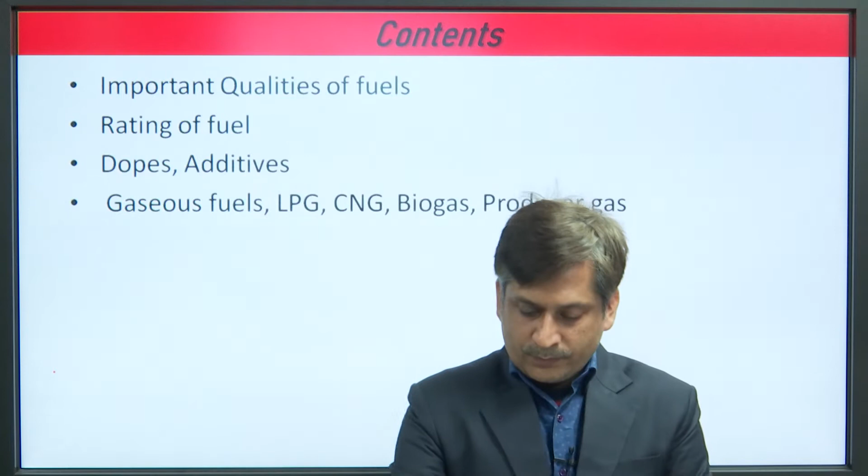So this is again a repetition of the previous lecture, important qualities of CI engine fuels. You know that what is CI engine fuel? Compression ignition fuel engine. So it should have different types of properties, like knock characteristics, volatility, starting characteristics, smoking and odor, viscosity, corrosion and wear, handling ease.

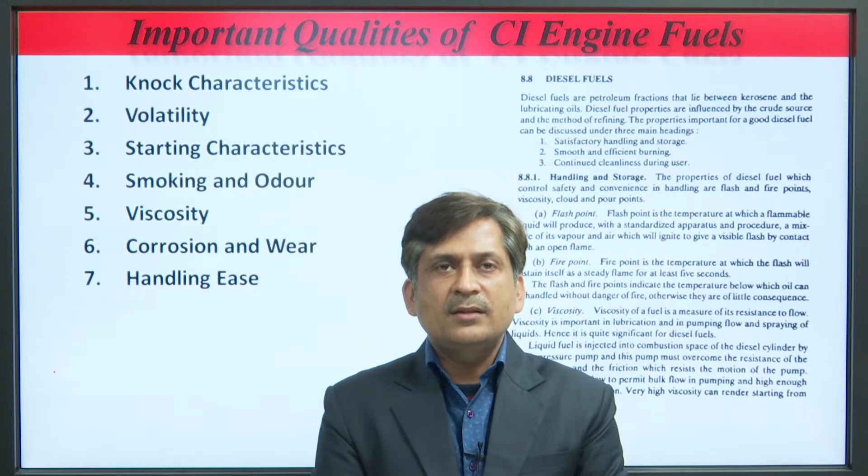We know that in the CI engine we use diesel, which is known as the conventional fuel. The problem with diesel is its limited resources and the emissions. That is why we have to go for alternative fuels in the CI engine. We have discussed how it is handled and stored, its smooth and efficient burning characteristics, and continued cleanliness during use. So these are the properties which are desirable from the CI engine fuel.

So you all know this is the combustion pressure theta angle which defines the phases of combustion. We have discussed this in unit 3. It has 3 phases of combustion. The first phase is ignition delay, which is a very important parameter. This ignition delay is the time period between when you inject the fuel and when the first pressure pulse is observed; that duration is called ignition delay.

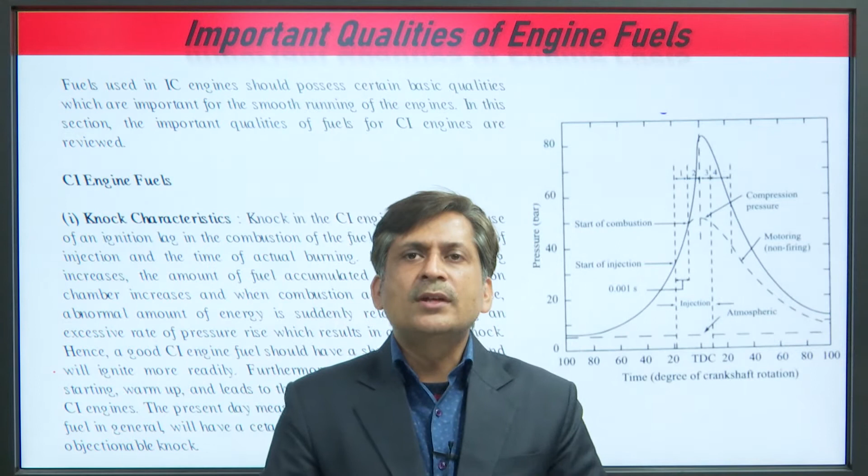Ignition delay depends upon many parameters. We have discussed all the parameters like the fuel characteristics, different viscosities, its cetane number, RPM, types of fuel induction. So all these variables affect the ignition delay. Because this unit is dedicated to fuels, the cetane number and fuel characteristics—viscosity, kinematic viscosity, density, specific gravity—affect this ignition delay.

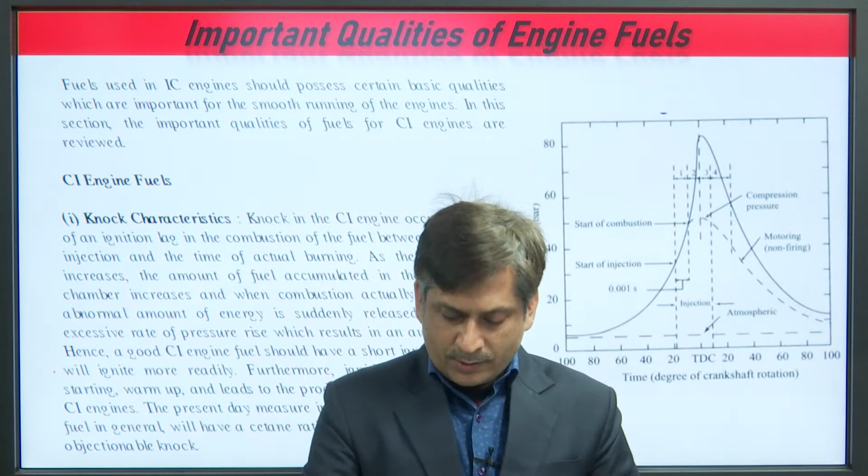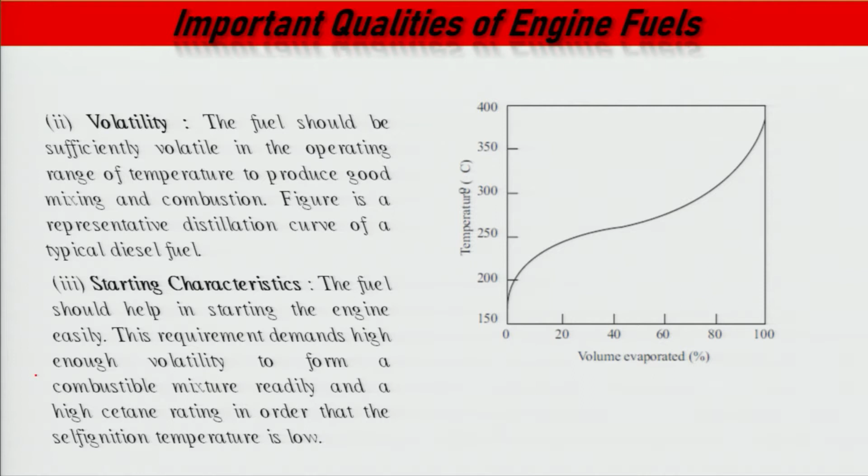Similarly, volatility—we have discussed this. Volatile means, for a given operating range of temperature, how it is vaporized; that is known as volatility. Then the starting characteristic: the fuel should help in starting the engine easily. This requirement demands high enough volatility to form a combustible mixture readily, and a high cetane rating so that the self-ignition temperature is low.

Smoke and odor are qualities of the fuel, characteristics of the CI engine; it should be as low as possible, which is a main problem in the case of diesel engines using conventional diesel. So it is better to use alternative means, or dopes or additives, to suppress this smoke and odor.

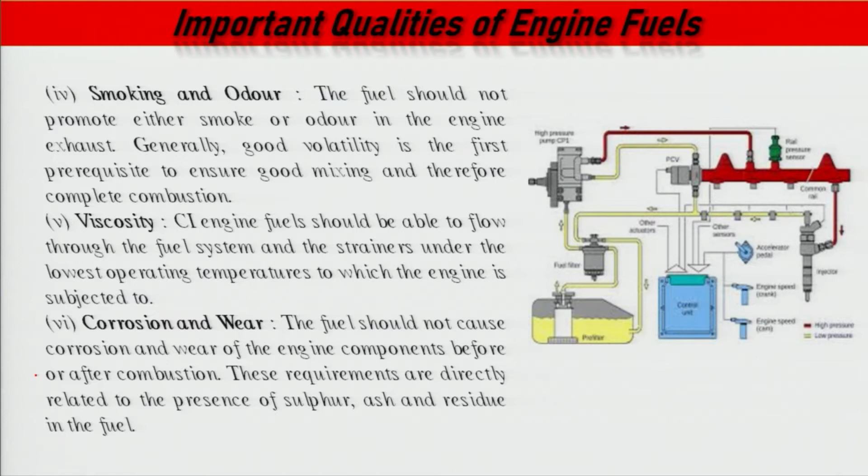Similarly, viscosity—you know it is the resistance to flow. We study how it varies with respect to different operating conditions, and it is a very important property because fuel injection depends upon the viscosity. So it should be optimized.

So the composition of gasoline—these are the important qualities of SI engine fuel, since the last one was for the CI engine fuel. We have discussed in a nutshell the important qualities of SI engine fuel, also known as gasoline. These are the requirements for ideal gasoline: it should mix with air easily, be knock resistant, should not pre-ignite, and be easy to handle. It should have high calorific value and should not form gum and varnish—these are the desirable qualities of the SI engine fuel.

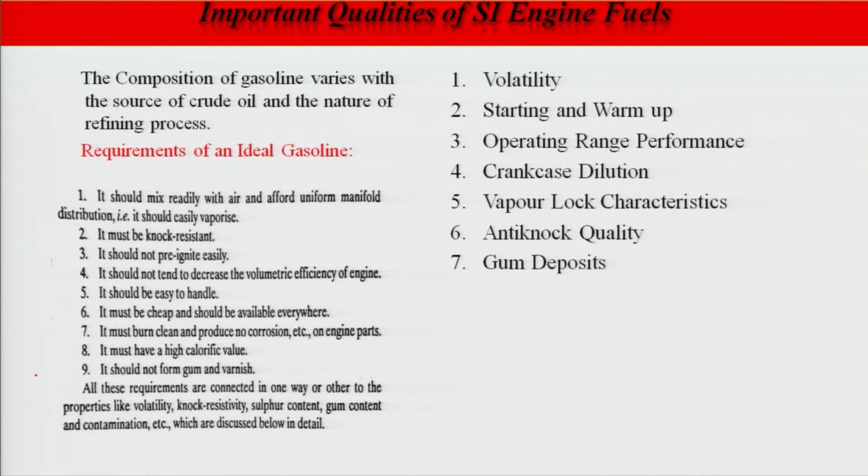It has volatility just like in the CI engine, then starting and warm up, operating range performance, crankcase dilution, vapor lock characteristics—because of the volatility, anti-knock quality, and gum deposits.

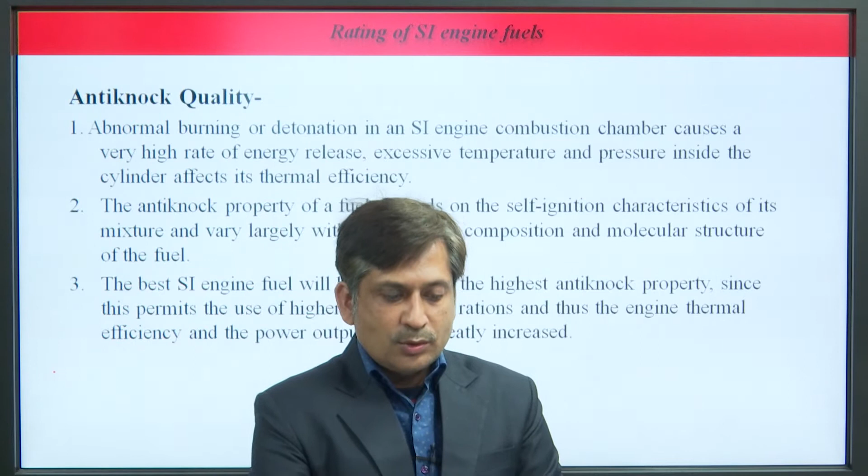So what is anti-knock quality? Anti-knock means to suppress the abnormal burning or detonation in the engine. The fuel should have the characteristic that it should not pre-ignite. The combustion flame should start from one end and travel throughout the cylinder, throughout the combustion chamber, in a uniform way. There should not be pre-ignition or any pressure variation or high pressure wave generation. The burning should be very smooth, and the dP over d theta, the rate of pressure rise, should be smooth.

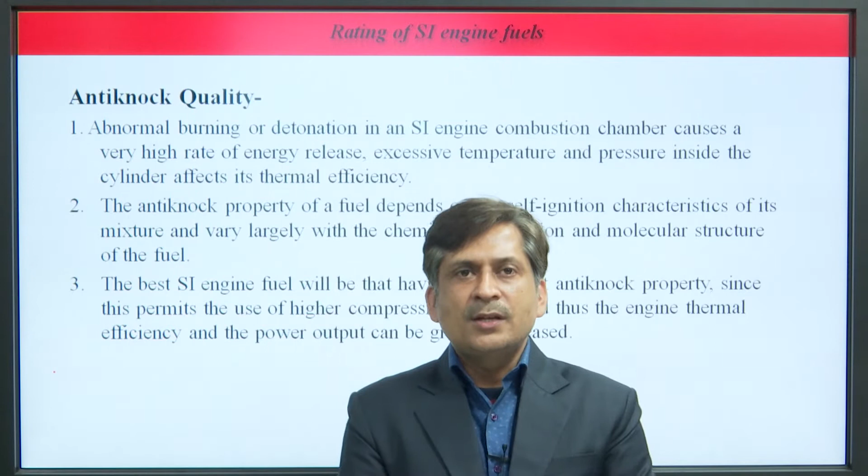So the best SI engine fuel will be the one having the highest anti-knock property. How do you say that a fuel has the highest anti-knock characteristics? These are some ratings of engine fuels—so we rate the fuel. These are the parameters for rating: it is the highest useful compression ratio. You know that the SI engine efficiency, working on the Otto cycle, depends upon the compression ratio.

Higher the compression ratio, higher will be the thermal efficiency of the engine. But the problem is, if you use higher and higher compression ratio, there will be a problem of detonation in the combustion chamber. So this is the limitation for the compression ratio; the highest useful compression ratio is the limitation.

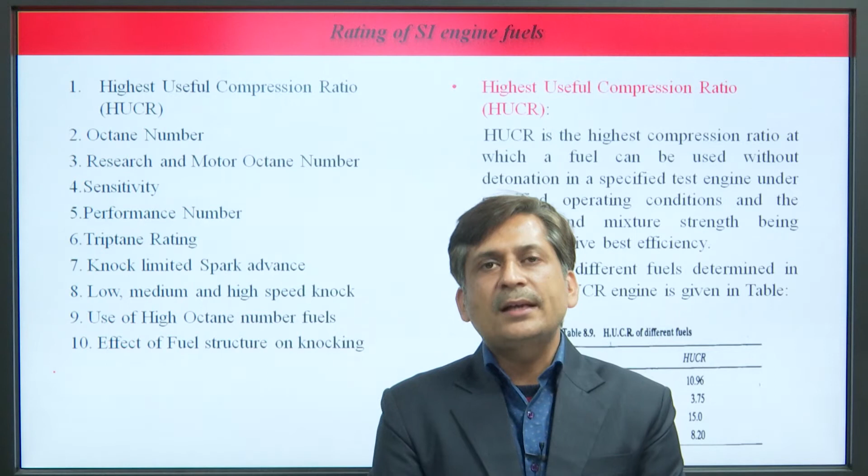It is optimized, it should be as high as possible, and to make the existing fuel, which is gasoline, useful, we can either modify the engine or modify the fuel. Modification is done by adding some additives or dopes into the conventional fuel, which improves its knock characteristics, so you can go for the highest compression ratio.

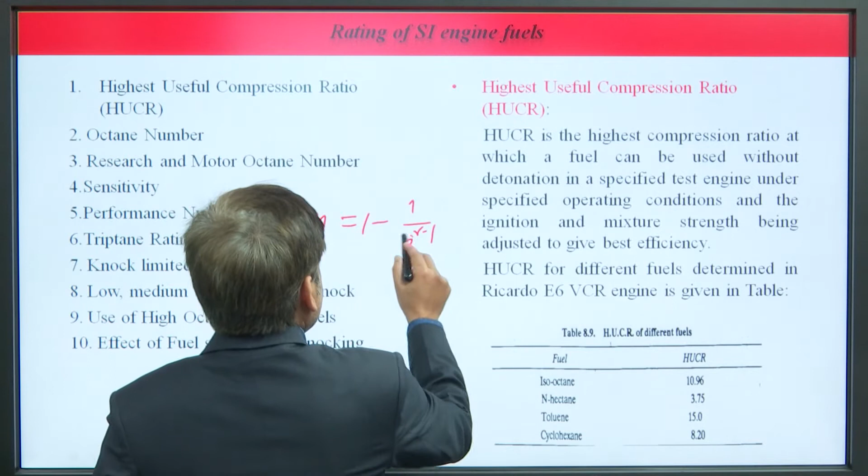Because the efficiency of the Otto cycle is 1 minus 1 upon R to the power gamma minus 1, where R is the compression ratio, you can go for a higher value.

Then octane number - we have discussed this - higher the octane number, higher the anti-knock characteristic of that fuel. It is of two types: research and motor octane number. There is a sensitivity, which is the difference of research and motor octane number.

Another number is also known as performance number. If you go beyond 100, then we go for the performance number. Triptane rating is also one of the rating parameters of SI engine fuel. Then knock limited spark advance, low, medium and high speed knock - we have discussed all these things in the previous lecture.

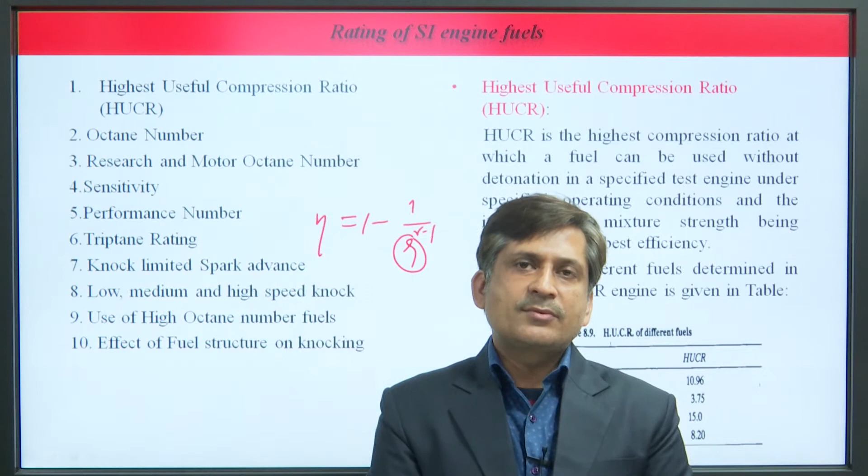Use of high octane number fuels, effect of fuel structure on knocking - because the fuel may have paraffins, branch chain paraffins, normal chain paraffins, naphthenes, aromatics. So all the composition affects its anti-knock characteristics.

So the use of high octane number fuels - the engine can be operated at high compression ratio, and therefore with high efficiency without detonation. The engine can be supercharged.

What is supercharging? To increase the density of the inducted mixture is known as supercharging. So the engine can be supercharged to high output without detonation. We can go for supercharged mixture also.

Supercharging affects the power output of the existing engine, so it is improved. The performance of the engine is improved by supercharging - instead of inducting fuel at atmospheric pressure, you are inducting fuel at some higher pressure. So by doing supercharging, the performance of the existing engine is improved.

So the third one is optimum spark advance, which may be employed, raising both power and efficiency. So we can go for optimum spark advance, then the effect of fuel structure on knocking.

Knocking is proportional to the amount of pre-oxidized but unburnt end gas which undergoes auto ignition. Very light paraffins, such as methane, having very low molecular weight - for example methane, ethane and propane - have excellent anti-knock properties.

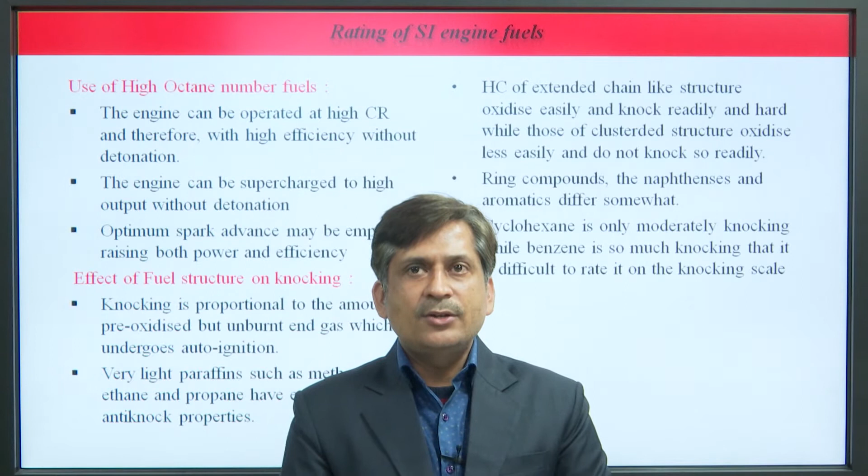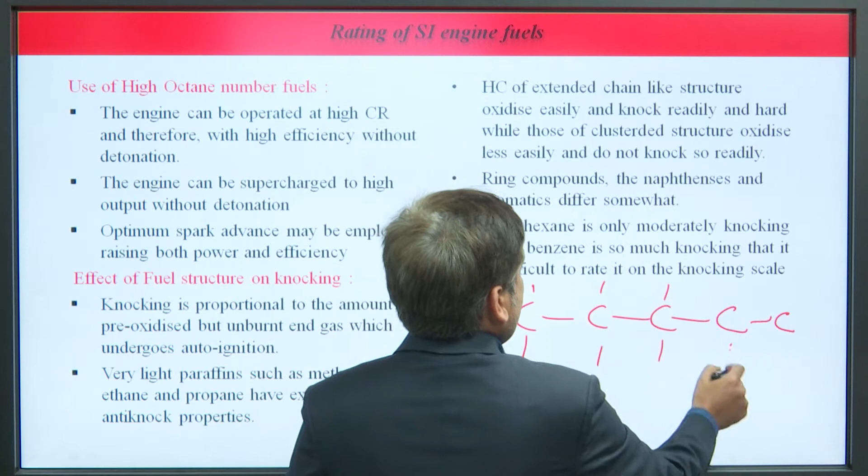Hydrocarbons of extended chain-like structure oxidize easily and knock readily and hard, while those of clustered structure oxidize less easily and do not knock so readily. So as the carbon chain length increases, the anti-knock property reduces, so it is more prone to knocking.

This is because it is oxidized more easily, and the clustered chain means branched chain. So branched chains have better anti-knock characteristics because they are clustered in structure, just like ring compounds, and naphthenes and aromatics have some different behavior.

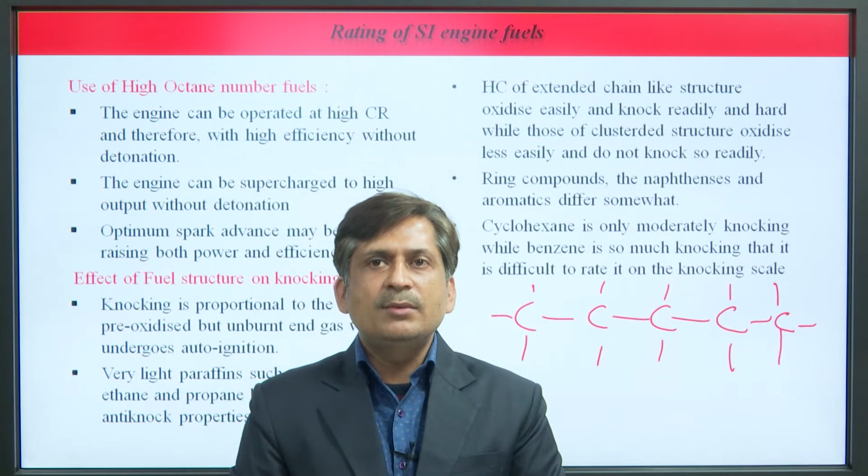Cyclohexane is one of the different types of hydrocarbon, which is only moderately knocking, while benzene is so much knocking that it is difficult to rate it on the knocking scale. So benzene has a very strong knocking tendency.

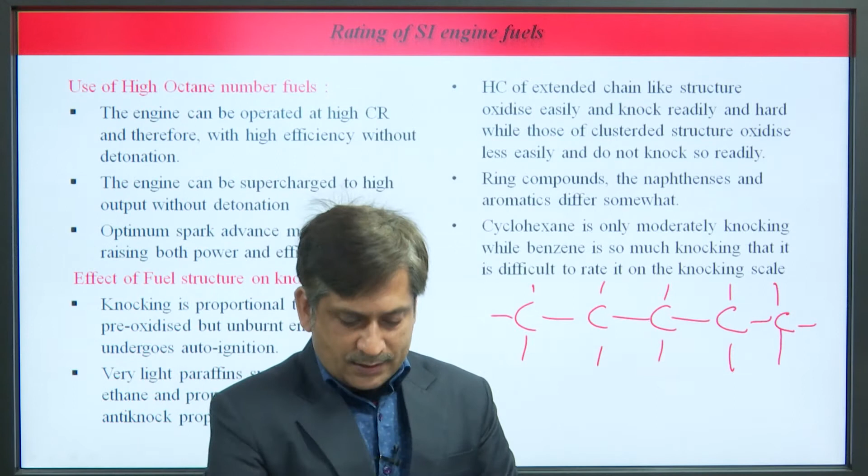Similarly, we can discuss the rating of CI engine fuel. The cetane number of diesel engine fuel indicates its ignition characteristics, which we described in the last lecture. Higher the cetane number, higher the anti-knock characteristics.

The cetane number affects a number of engine performance parameters like combustion, stability, drivability, smoke, noise, emissions, CO and hydrocarbons. Biodiesel can be a replacement for CI engine fuel, and it is derived from straight vegetable oils, which may be edible or non-edible.

So the biodiesel formed from straight vegetable oil has a higher cetane number than conventional diesel. If you use biodiesel in place of diesel in an existing diesel engine, it may give rise to less pollution and can burn more effectively compared to diesel, but there are problems with biodiesel, which I will discuss in the coming lecture.

So this results in higher combustion efficiency and smoother combustion. The cetane number of diesel fuel is measured according to ASTM D613, the standard test method for cetane number of diesel. So cetane number is a measure of the ignition quality of diesel engine fuels, as it indicates the comparative ease with which a diesel fuel will ignite.

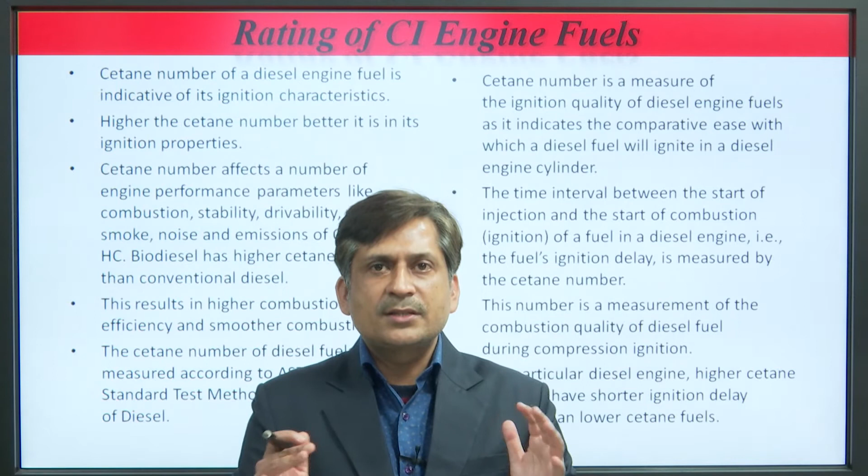So this is all about this. In a nutshell, the cetane number is the criteria for the rating of the CI engine.

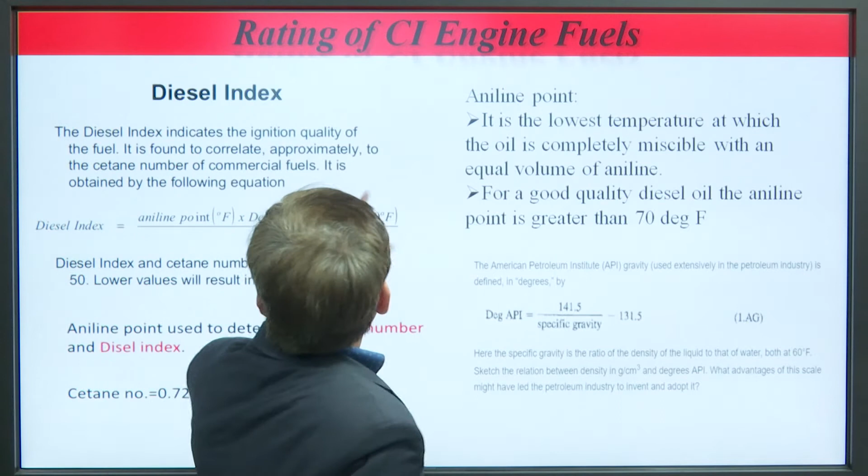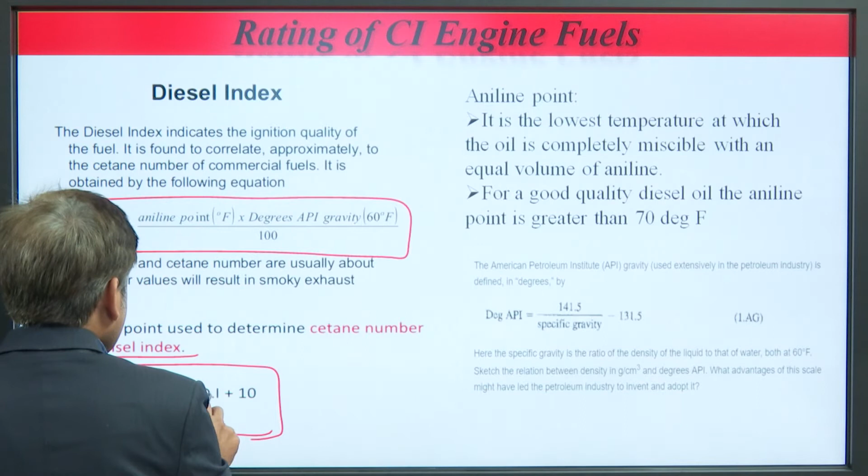So, these are other criteria like diesel index. So, how is it calculated? This is the formula for diesel index: it is equal to aniline point in degree Fahrenheit into degree of API gravity at 60 degree Fahrenheit upon 100. So, diesel index is evaluated from this, and the cetane number can be evaluated in terms of diesel index: it is equal to 0.72 into diesel index plus 10.

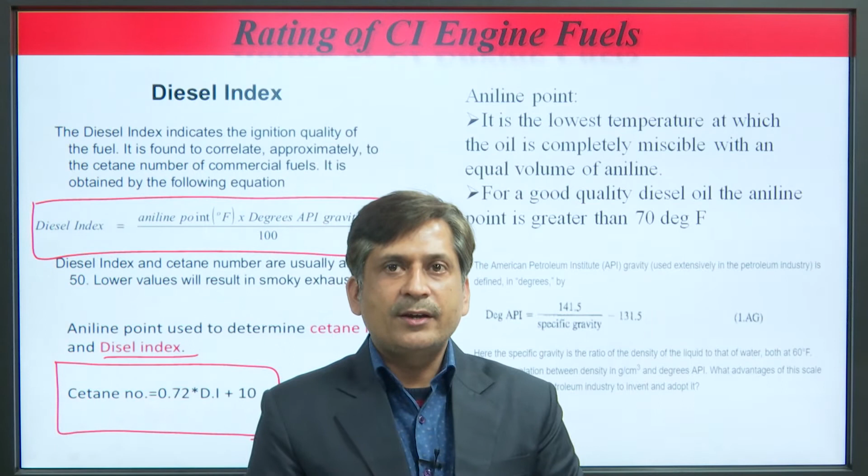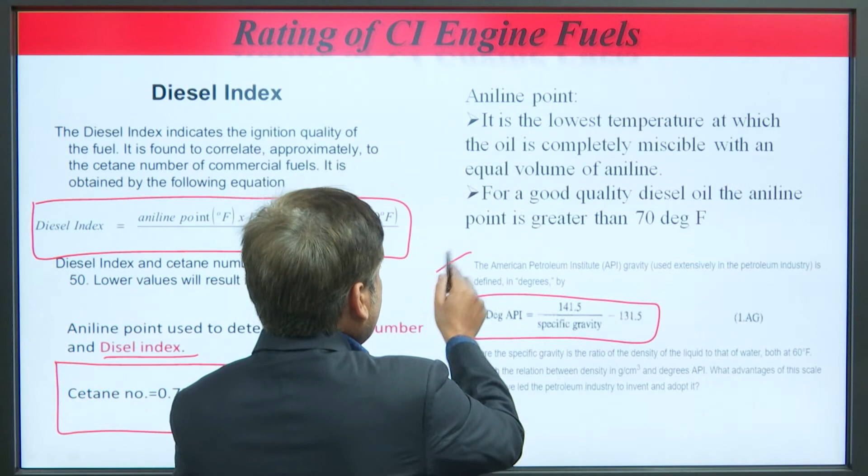Now, aniline point is the lowest temperature at which the oil is completely miscible with an equal volume of aniline. So, for a good quality of diesel oil, the aniline point is greater than 70 degree Fahrenheit. So, this degree of API can be measured with the help of this specific gravity. So, this API gravity is one of the other parameters for rating of the CI engine fuel.

Now, come to the dopes and additives. So, what are dopes, what are additives? These are some solvents which are mixed into the conventional fuel, like petrol or gasoline for SI engines, or diesel for diesel engines. You can add some liquids like solvents, and they should be completely miscible in the operating range of the fuel, because when you use your vehicle from one place to another, there may be weather change. Say you go from Kanyakumari to Ladakh, the temperature variation is too much, maybe minus to plus 40 degrees Celsius. This is known as the operating range of temperature.

So, these additives, which are very costly, are mixed into the conventional diesel to improve its characteristics, to improve its performance and to reduce the emissions. Combustion problems can be solved by the combustion chamber design. Either you design your combustion chamber, you modify the materials of your engine, or you modify the fuel by enhancing the fuel quality. Fuel quality we have discussed in the last few slides: for SI engine fuel it is octane number, and for CI engine fuel it is cetane number. So, fuel quality should be improved.

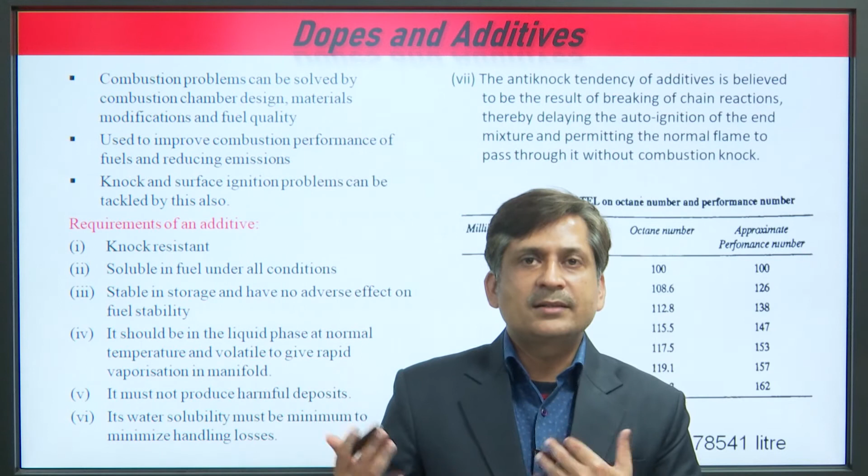First, it should be knock resistant: it should have a higher octane number if it is used for blending in the SI engine, or a high cetane number if it is blended into the CI engine. Then soluble in fuel under all operating conditions, stable in storage, and have no adverse effect on fuel stability. It should be in the liquid phase at normal temperature and volatile to give rapid vaporization in the manifold, because finally it has to mix with air through vaporization. So, it should have better vaporization, just like petrol or diesel. It must not produce any harmful deposits after burning, and its water solubility must be minimum to minimize handling losses.

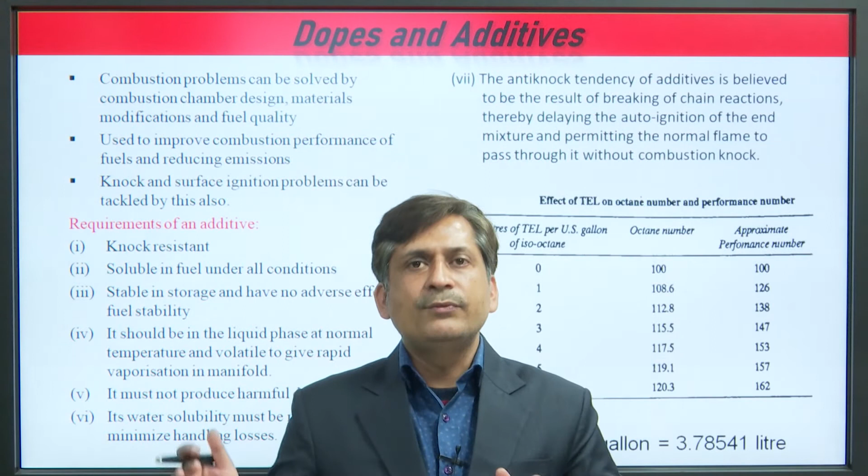And last one, the anti-knock tendency of additives is believed to be the result of breaking of chain reactions, thereby delaying the auto ignition of the end mixture and permitting the normal flame to pass through it without combustion knock. So, how does it work? It breaks the chain reactions, thereby delaying the auto ignition. So, finally, it works on the principle that it suppresses the chain reaction or auto ignition tendency of the end fuel also. It means it should have high knock resistance property.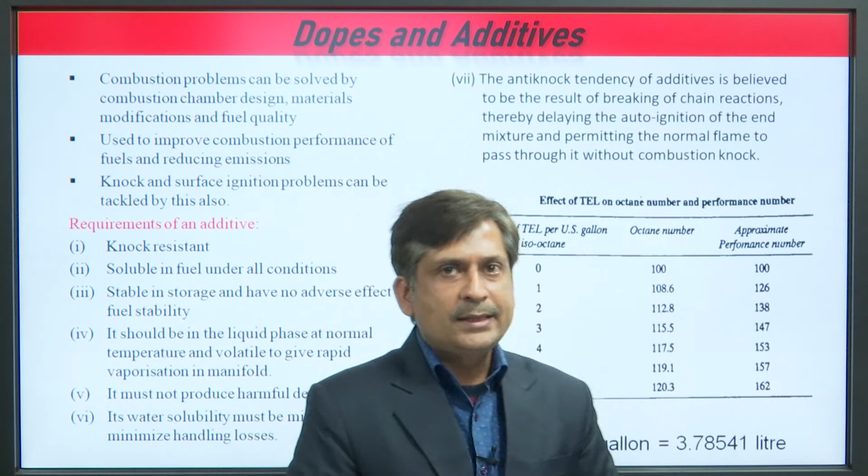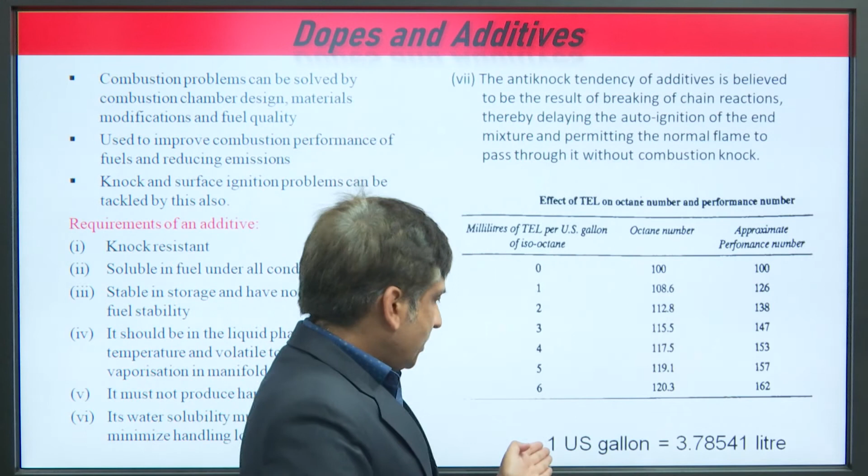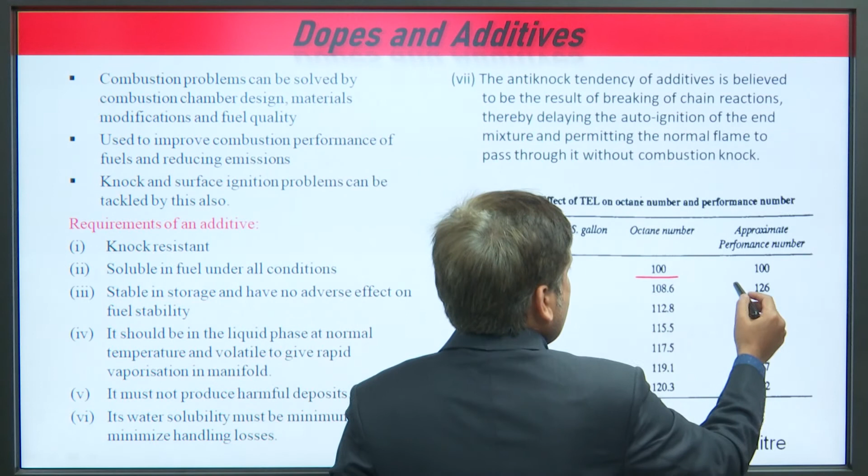You can see through this diagram, tetraethyllead, TEL, is one of the dopes or additives for petrol, and you can see milliliters of TEL per US gallon. What is a US gallon? You should know that a US gallon is equal to 3.78541 liters. So, it is mixed in milliliters per US gallon; if you are mixing 0, then octane number is 100. This is another rating criteria, performance number. We will focus on this.

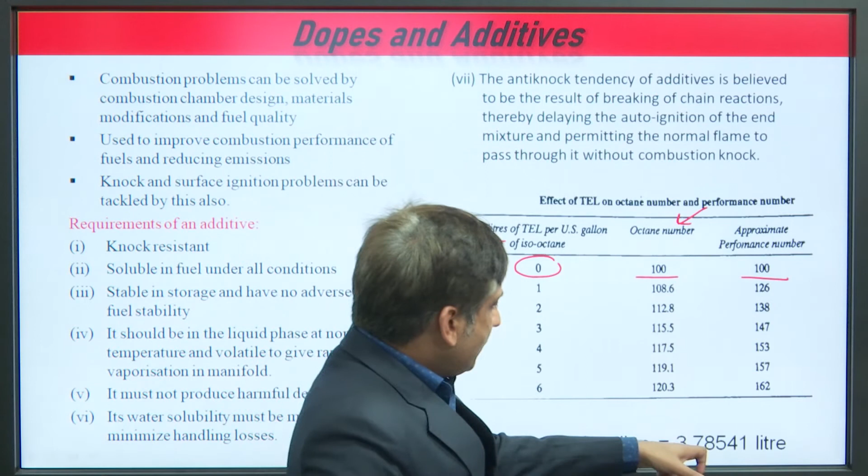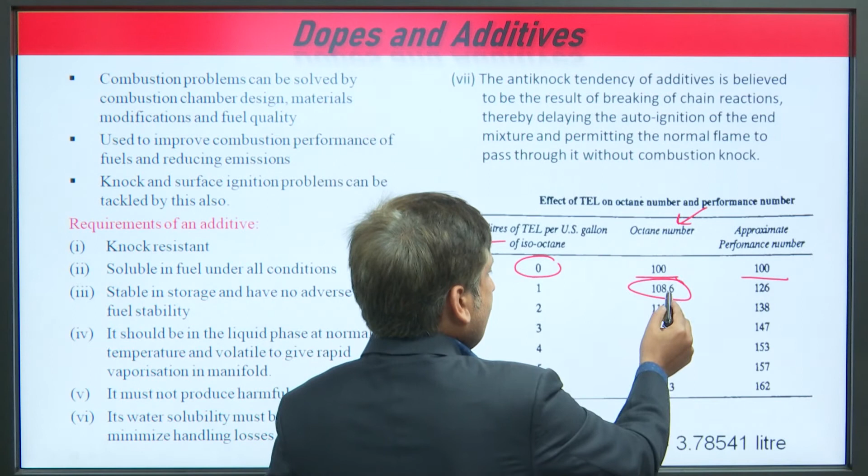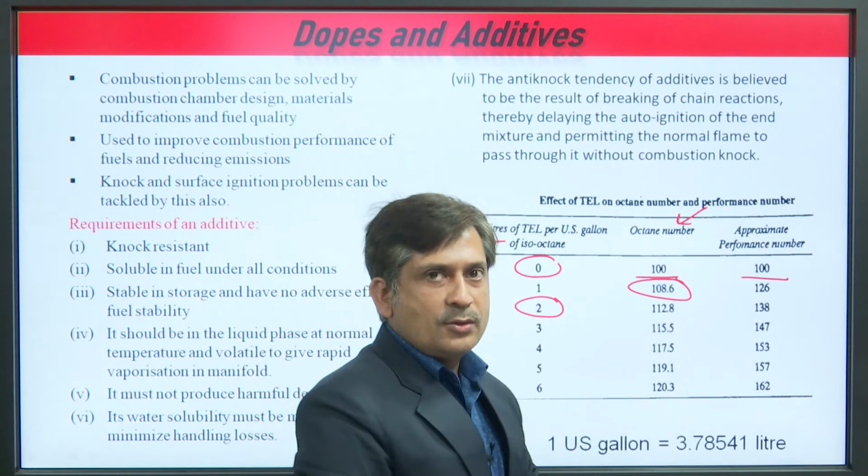If you add 1 milliliter in 3.78541 liters of petrol, then you can see that its octane value, which is evaluated from the CFR engine, is enhanced from 100 to 108.6. If you add 2 ml to the 3.78541 liters of petrol, the value further increases, and it keeps increasing. At 6 ml it is approximately 120.3.

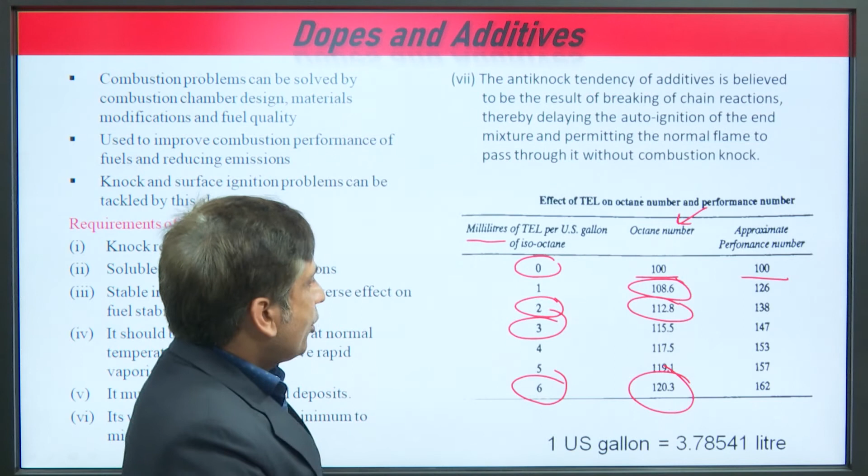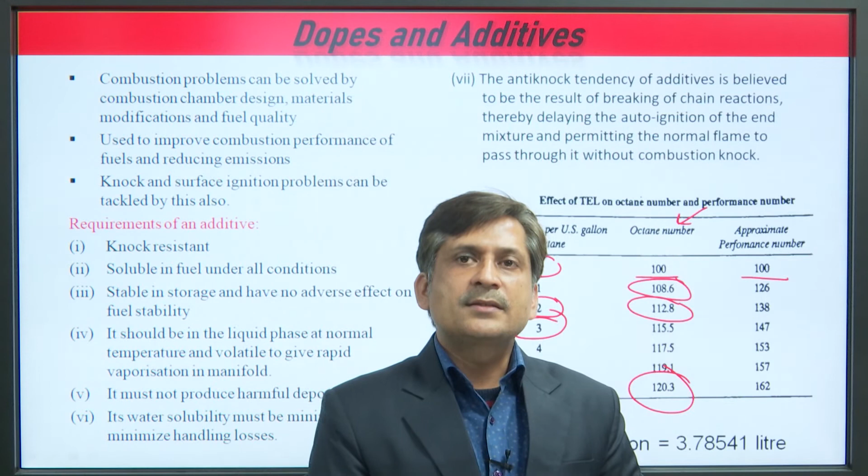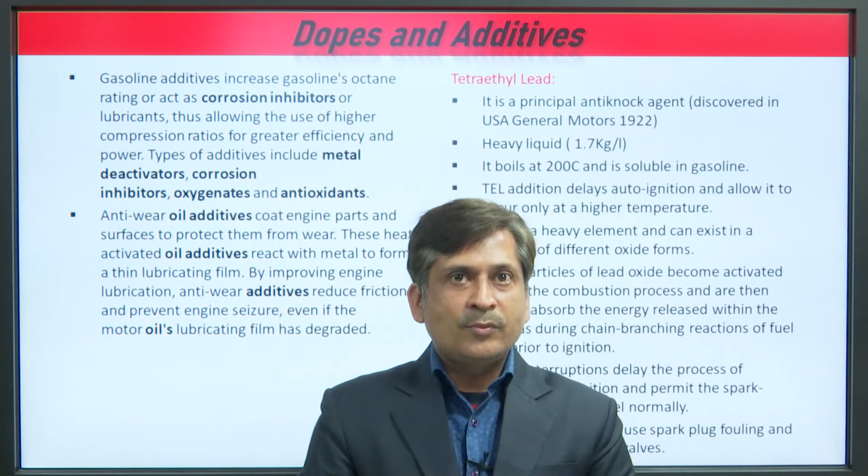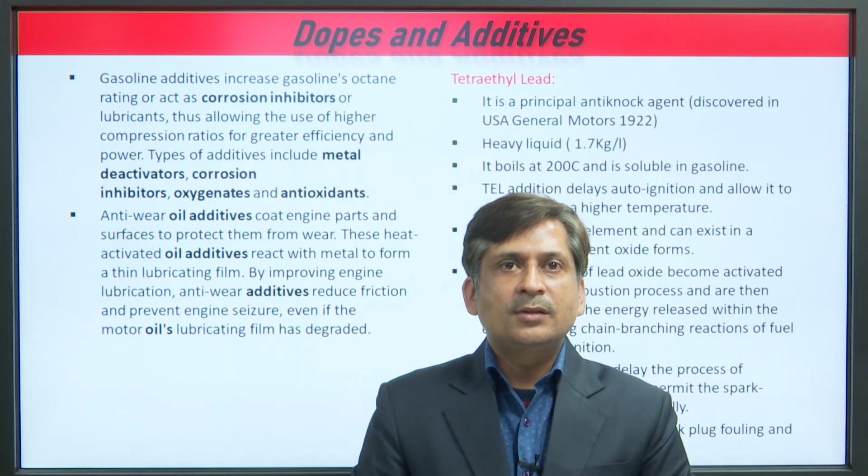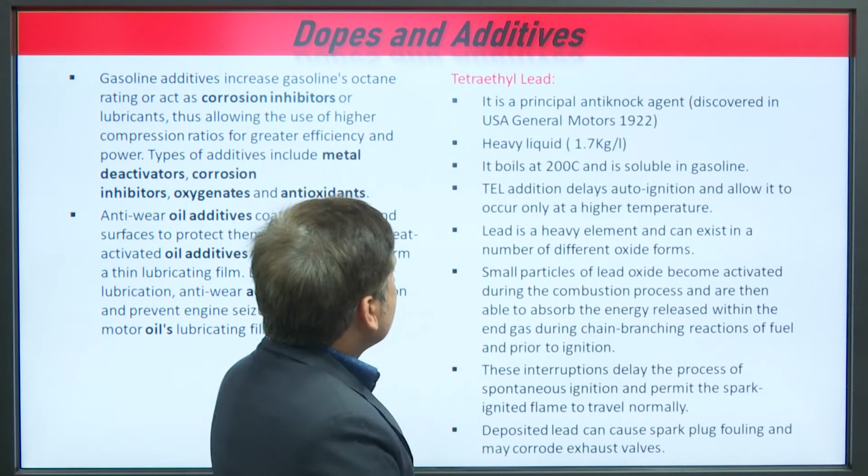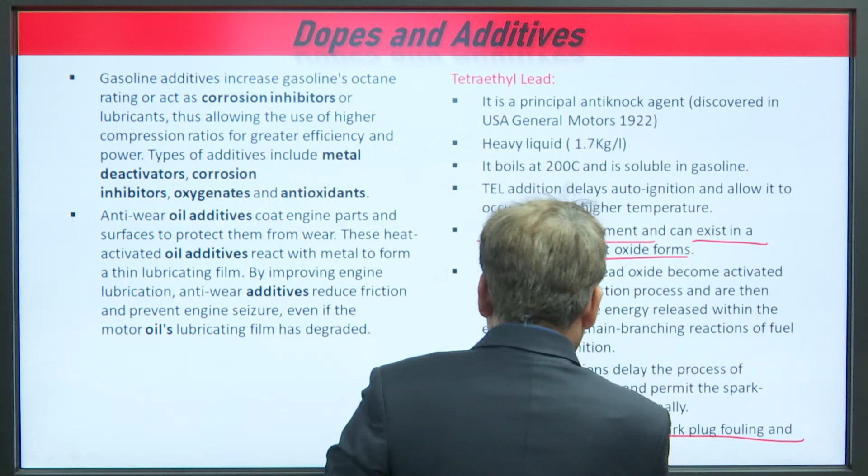So, this is tetraethyl lead. It is a principal anti-knock agent, and these are the characteristics of tetraethyl lead, which is a very heavy element and can exist in a number of different oxide forms. But the deposited lead can cause spark plug fouling and may corrode exhaust valves.

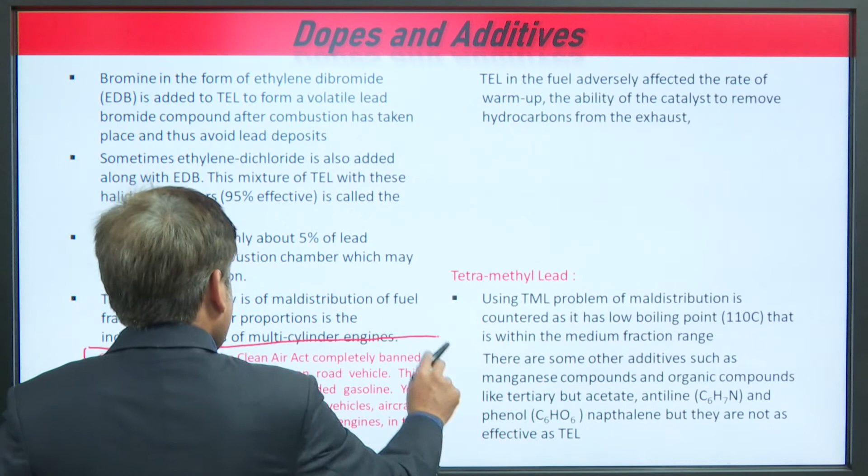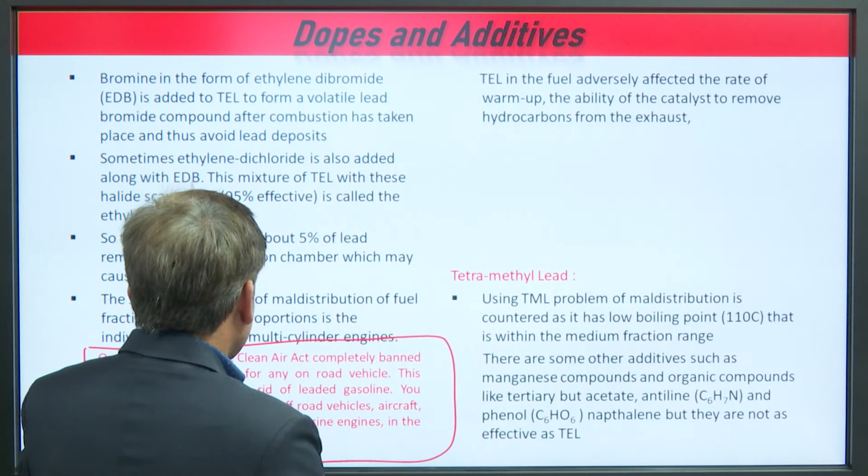In January 1996, the Clean Air Act completely banned the use of tetraethyl lead. This hasn't completely gotten rid of leaded gasoline. It is still permitted for off-road vehicles, aircraft, racing cars, farm equipment and marine engines.

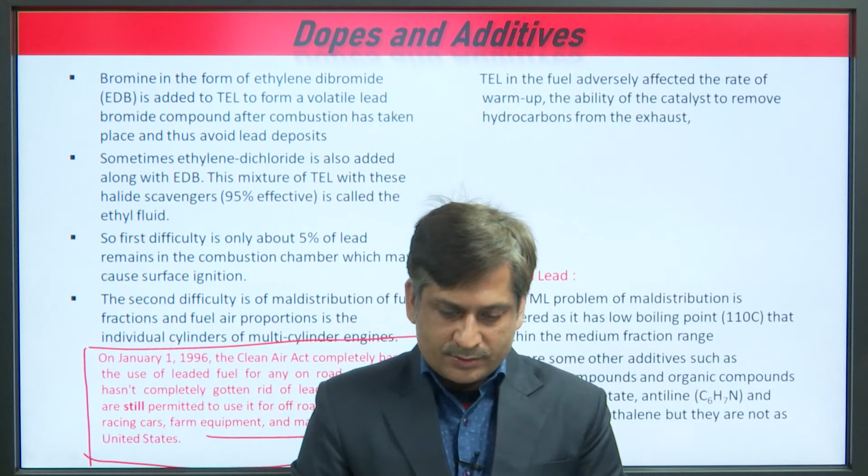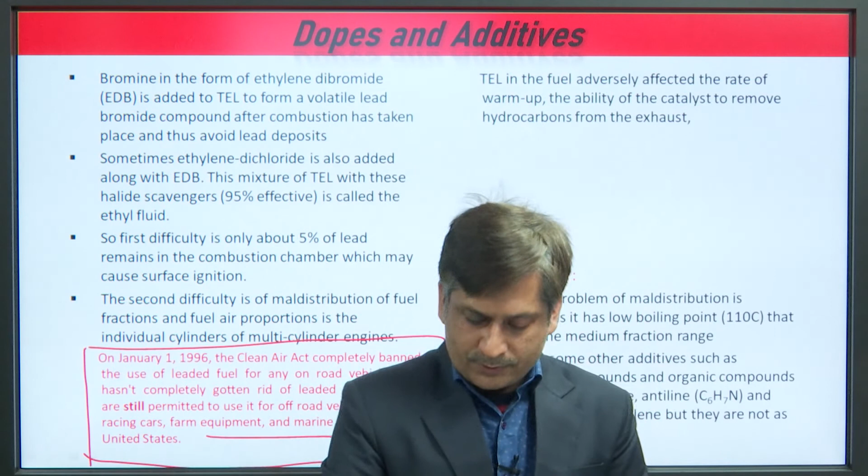So, now tetraethyl lead is not used. In place of tetraethyl lead we can go for tetramethyl lead also. So, it is another additive. Water injection may be another technique to control the knock.

Nowadays the government is focusing on ethanol blending. The government had earlier fixed a target of 10% ethanol blending by 2022 and 20% by 2030, but the plan now is to directly migrate to 20%, as this level of blending is successfully being used in countries such as Brazil. So, like Brazil, the Indian government has also recommended the use of ethanol up to 20%.

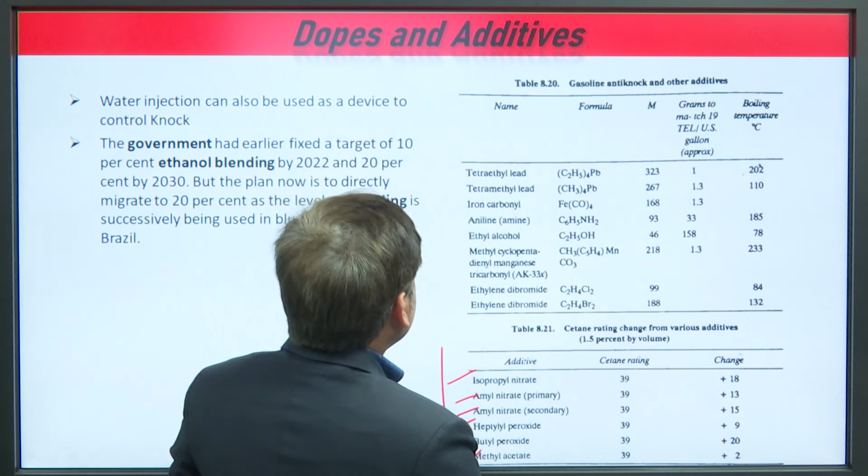This is a table of gasoline anti-knock and other additives and their characteristics. These are some cetane improvers, isopropyl and amyl nitrate for the diesel engine, butyl, methyl, etc. And this is for the SI engine, like tetraethyl lead, methyl lead, iron carbonyl, aniline, ethyl, methyl. This is a list of dopes for SI engine fuels.

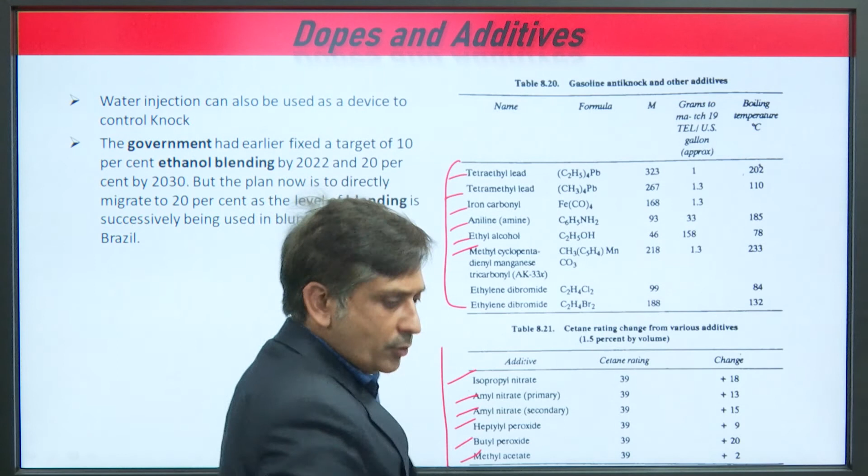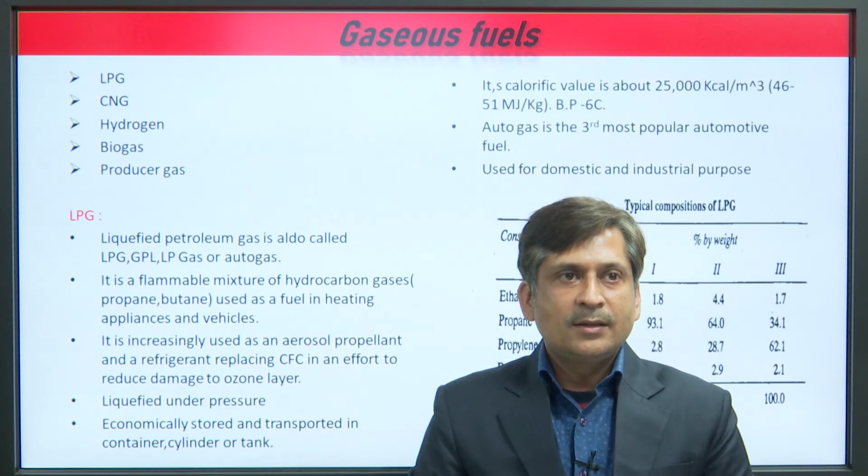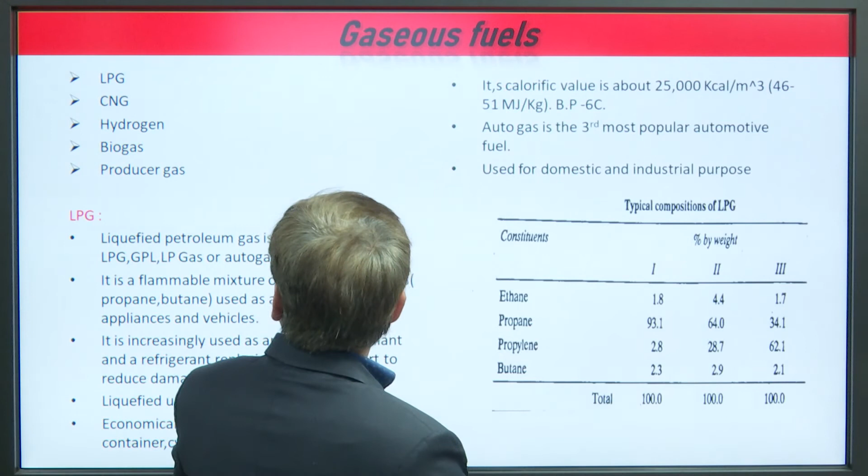Now, we come to the gaseous fuels. Gaseous fuels exist in the gaseous phase: LPG, CNG, hydrogen, biogas, producer gas. So, these are the characteristics of LPG fuels. So, what is liquefied petroleum gas? It is also called LP gas or auto gas.

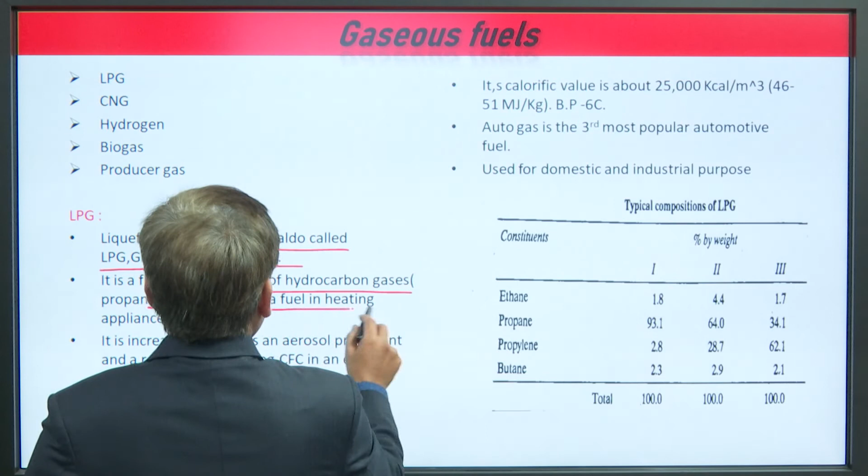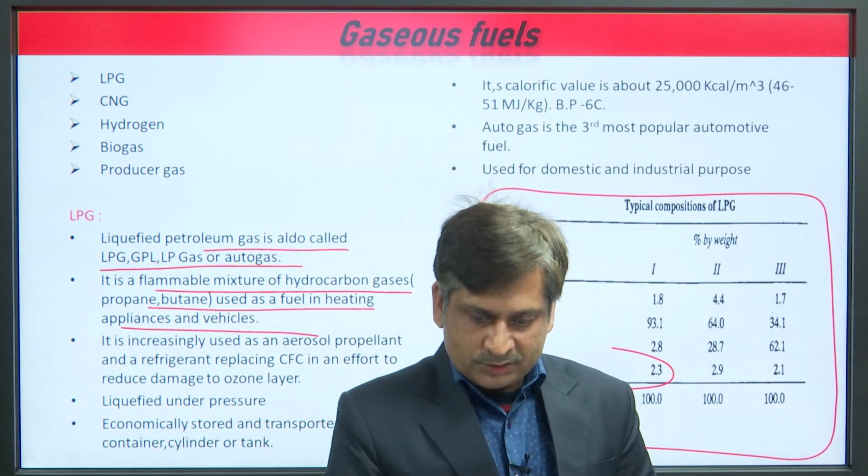It is a flammable mixture of hydrocarbon gases, propane and butane. This is the composition of LPG: ethane, propane, propylene, and butane, in the form of normal or isobutane. It has approximately 51 megajoules per kg of calorific value.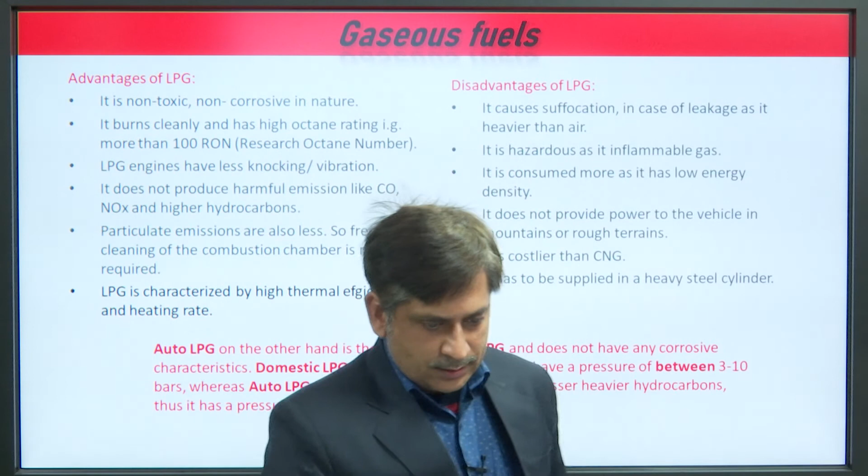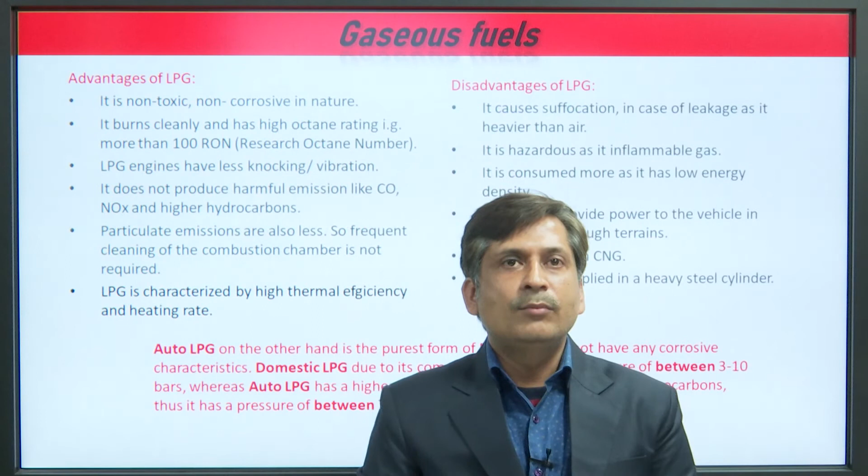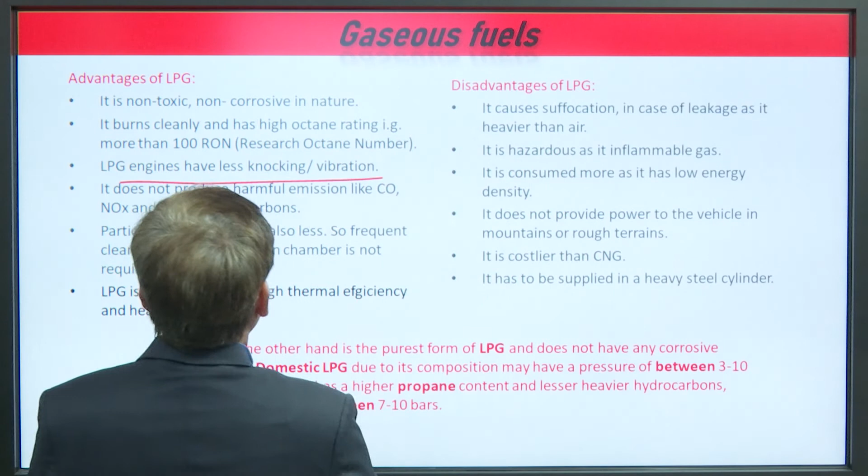Now, these are the advantages of LPG: it is non-toxic, non-corrosive in nature, it burns cleanly and has a high octane rating, more than 100. So, LPG engines have less knocking and vibration, and particulate emissions are also less. So, frequent cleaning of the combustion chamber is not required. LPG is characterized by high thermal efficiency and heating rate.

These are the disadvantages of LPG: it is inflammable, and it does not provide power to the vehicle in mountains or rough terrain, because it reduces the power of the engine. Auto LPG and domestic LPG are different. It is legal to use auto LPG in the automobile, but it is not legal to use domestic LPG in place of auto LPG.

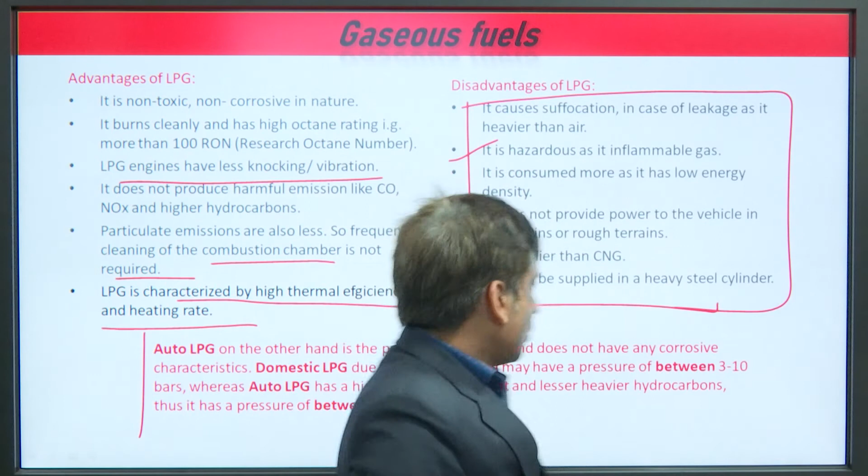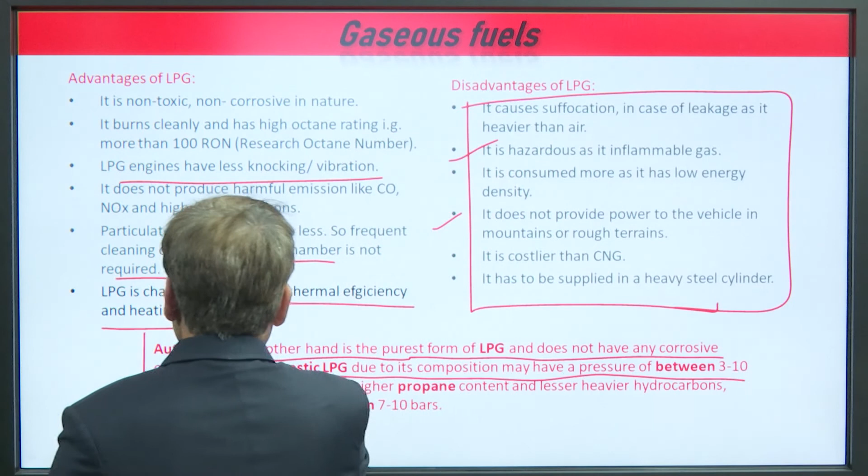Auto LPG, on the other hand, is the purest form of LPG and does not have any corrosive characteristics. Domestic LPG, due to its composition, may have a pressure of between 3 to 10 bars, whereas auto LPG has a high propane content and fewer heavier hydrocarbons, thus it has a pressure of between 7 to 10 bars.

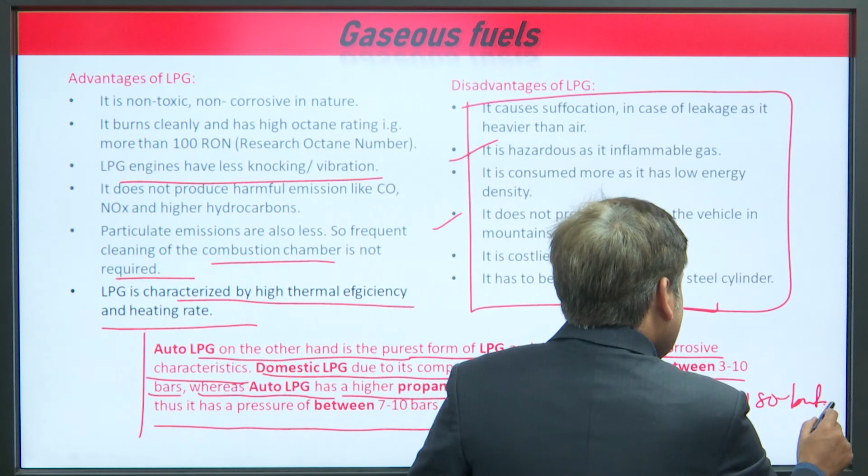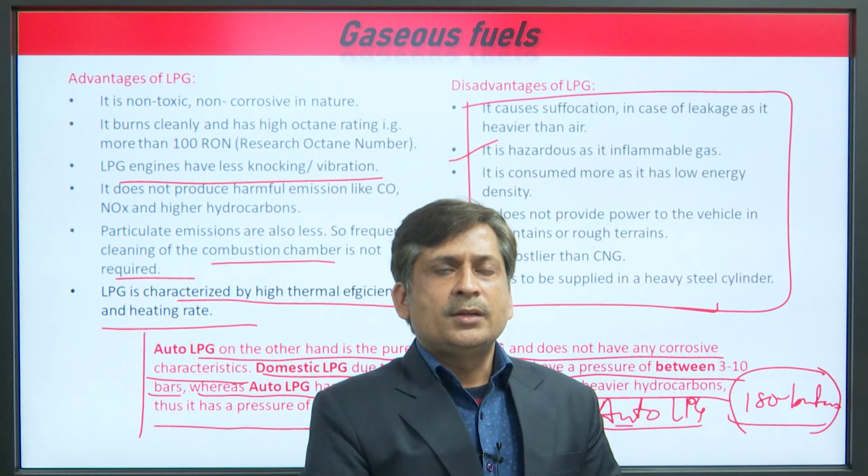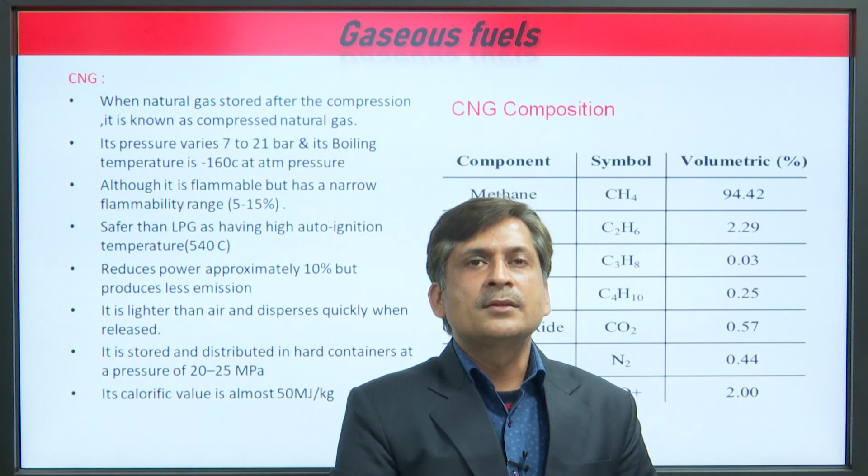So, in this lecture we have discussed LPG; then we can also go for CNG. CNG has more methane in its composition, and is also known as compressed natural gas. So, CNG is one of the gaseous fuels.

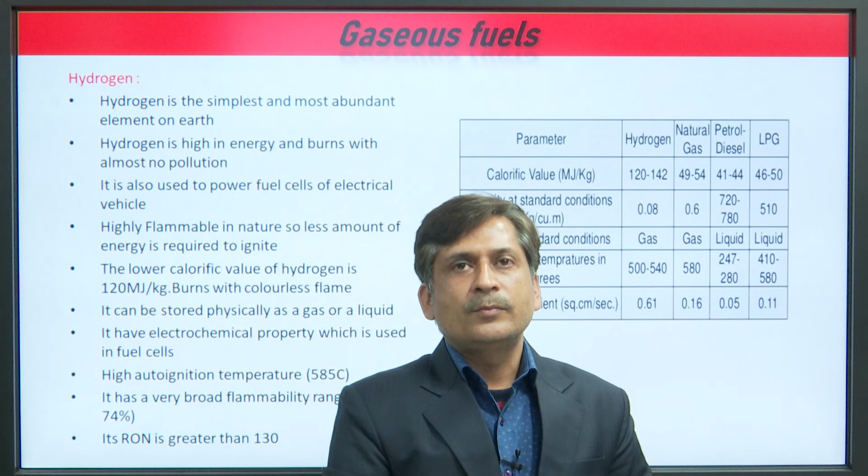Then hydrogen is another gaseous fuel we can use as an SI engine fuel. It is a very clean burning fuel. We can go for biogas also. So, gaseous fuels can be used in various ways. In the next lecture, we will discuss these gaseous fuels used in existing engines, their advantages, disadvantages, and how they affect emissions and power.